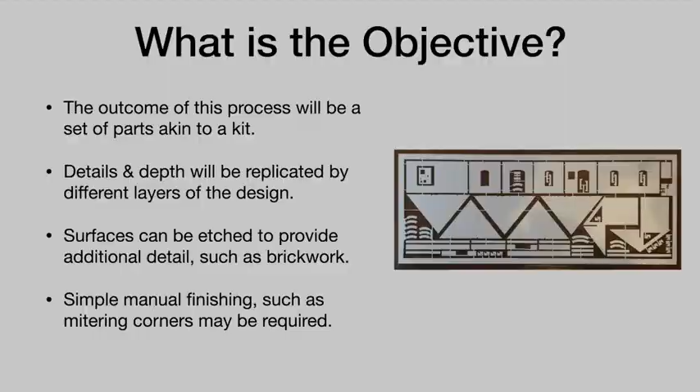A grand title for some simple information. I use TurboCAD 2D on a Mac. I export that design and use my club setup and club laser cutter to produce the final article. This process has highlighted a few compatibility issues along the way, which I will explore later.

There are many other 2D CAD products available, some of them free, but for me, usability was a key issue, and some of the cheaper alternatives are not as user-friendly, but it's a personal choice. A quick word about materials. I'll look briefly at 4 types.

I've used TroLase, the plastic card. Sometimes this is referred to as Rowmark, which is an American company and a product not normally available to the UK hobby user. A sheet of TroLase is around 1100 by 600 millimeters and costs about £30. Beware, products that are significantly cheaper and advertised as suitable for laser cutters aren't, in my experience. This may seem expensive, but with careful use of material, which I'll cover later, it can produce very cost-effective buildings.

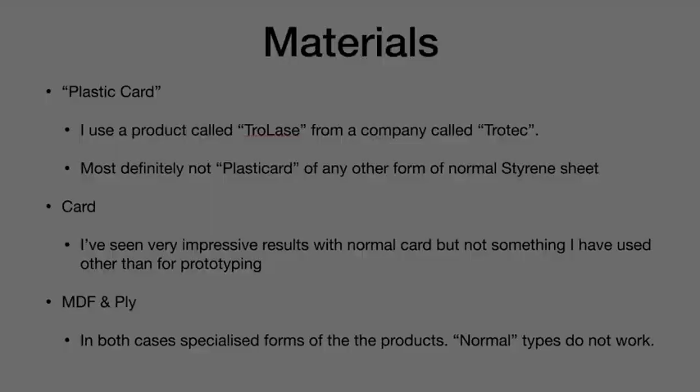My thoughts on pros and cons. Many of these are true for any building or other object made from these materials and not specifically to do with laser cutting, but just to cover those particular points. Both the plastic card and the MDF etch very well for such things as mortar courses, not something that can be done effectively with card. The slightly oily finish of TroLase requires cleaning and possibly a slight sanding to provide a better key for the paint, which is an additional job.

MDF is, in my experience, often supplied to a very nominal thickness. What is purportedly 3mm MDF, for instance, might be 3.2, 3.3 or even 3.4mm. Although that doesn't sound much, and in many cases isn't an issue, it is a major problem with any tab and slot joins or external corners. It's imperative you know how thick your final material is, certainly to the nearest 0.1mm, before you start your design.

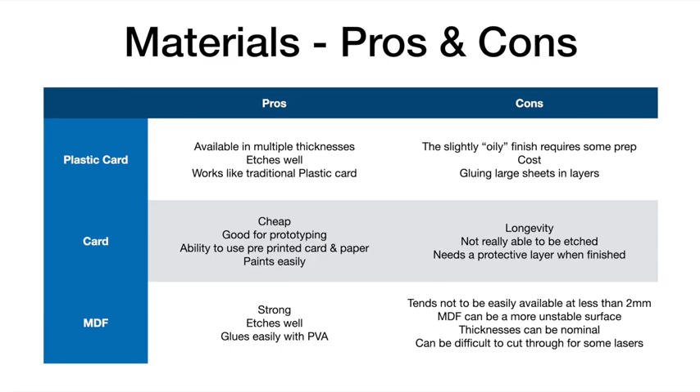Also worth noting is that MDF and ply can be difficult to cut through for cheaper hobby lasers or in greater thicknesses. I'll discuss how this can be mitigated a little later. You can also cut perspex, although I haven't done so, but again, be careful. Perspex is often cast, poured into a tray as a liquid and allowed to set. It can have a significant, in these terms, difference in thickness across a single sheet.

Now I'll look briefly at some lessons I've learnt. Obvious, I'm sure, to anyone with real CAD expertise, but as a novice, not so obvious to me at first. Rules are, of course, meant to be broken, but please consider these as suggestions that might help. All of these are fairly obvious, but nonetheless worth considering for a few moments.

It's really important to have a good understanding of what you're trying to get your object to look like before you start. If you're copying a real life item, then its size, shape, etc. will be decided for you.

But if not, I found it best to use a real building, even if I removed a few bays of windows, lost a floor, added some doors and so on. Using a real building as a basis meant that architecturally at least it looked right, and knowing what you're trying to do was a big help in the design.

Not noting the key dimensions can become incredibly frustrating and potentially disastrous. You will refer to these often. There are more than those shown here: sizes of windows, sizes of doors, and so on. It also helps if you have a good idea in your head how it will all go together, particularly regards layers and, for instance, how the corners will work. We'll look at how to help with that shortly.

Never draw the same thing twice sounds a bit odd, but all CAD programs have some kind, usually several, of replicate functions. On a large building with repetitive features, such as windows, draw it once, then use the replicate function to copy along a floor and between floors. You are much less likely to get errors.

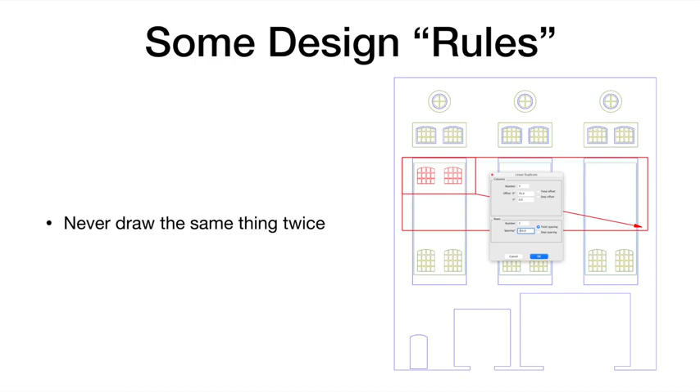Just to show a quick example. I've drawn one window and need to replicate it across all 3 bays and across 2 floors. First, I select the window and use the replicate function to create its companion in the same bay. Obviously, this is what it looks like in TurboCAD. Then I select both windows and select replicate using the major dimensions I noted earlier. And you end up with all the windows drawn.

It's quicker and, most importantly, much less likely to produce an error. You can use copy and paste, but risk putting the window in the wrong place. Even a small error will be noticeable on the final building. It is worth spending time to understand how the replicate function works in your software. This is a particularly useful lesson when drawing bricks. Drawing individual bricks will quickly become very tedious. Just one wall of the warehouse I've used to illustrate this has around 17,000 bricks.

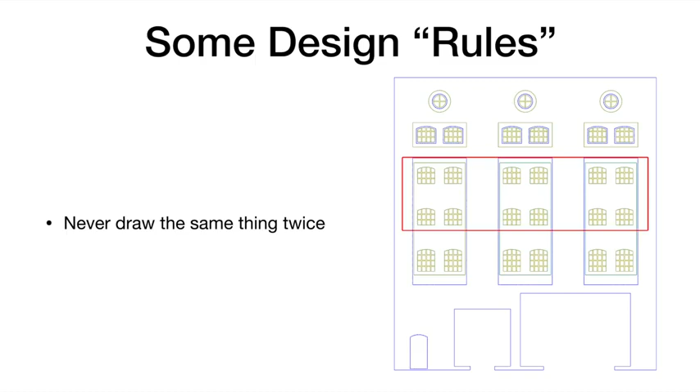When starting a new design, the first thing I do is set up the grid. 2 parts, the size and the spacing. TurboCAD draws the grid to a size you can define, even though the drawing area is much bigger. I tend to make the overall size of the grid reflect the size of the laser bed, for reasons I will explain later. The second key dimension is the grid spacing.

Typically, a brick measures 9 inches long by 4.5 inches wide by 3 inches high. In 4mm, this equates to 3mm by 1.5 by 1. Thus, for brickwork especially, I use a 0.5mm grid. That said, in a big building, this is a very fine grid and can cause problems by simply selecting the wrong grid point or the snap to grid function, which is generally a good thing, snapping to the wrong point on the grid. When drawing, say, the side of a warehouse, I would change the grid to give a wider spacing to avoid these issues, only tightening up when doing the detail.

The other thing to consider is what units you are using for the drawing. I tend to use the model size, so a 100mm long line will produce a 100mm long cut. But particularly if you are drawing a real building and using real dimensions for your source material, it might be better to apply a scale, say 1/76, so a 25-foot long line will still produce a 100mm long cut. It makes no practical difference, and it's just personal preference as to what you find the easiest.

Frankly, you can lay out the drawing in the CAD program any way you like, but I have found 2 approaches very worthwhile. The first is to lay out the object, whether it be a building or, say, a wagon or coach, as a net. Simplistically, think of a net as an unstuck cardboard box. On a box, of course, the dotted lines are creases and not cuts. Typically on a building, we might not have a base, and the top, or roof as we would normally call it, is unlikely to be a simple flat face. And so it might look something like this. In a true net, the roof parts will be at an angle, in line with the slope of the gable, but I found it easier to draw with all the objects at right angles if possible.

The second suggestion is in the use of layers. Now, layers is going to be a very confusing term. There are layers of plastic card or other material to provide the relief on your building, whether they be inset layers to provide windows and doors, or overlay layers to provide architrave, lintels and buttresses, and so on. And the CAD program you are using will have layers. These will be user definable and able to be shown in different colors and are exceedingly important in doing CAD drawings.

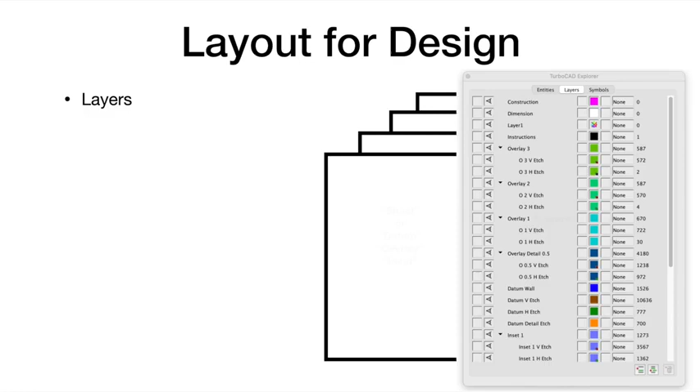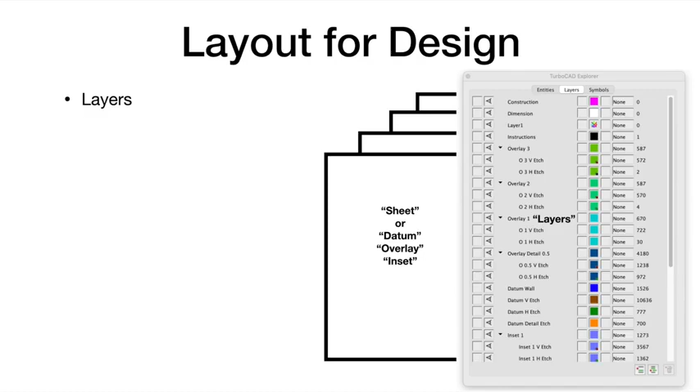Unhelpfully, it is a mixture of these last two terms that we will be looking at here. To simplify matters, I hope, I'll refer to the physical layers of plastic card as sheets. They will be datum, an overlay or an inset as appropriate. References to layers will be the layers as used by the CAD program. I will now show briefly how we go about using these layers.

The first thing to bear in mind is that there are two types of lines we will draw: cuts and etches. The names are self-explanatory, but there is a twist I will explain later. A cut is intended to separate parts, an etch is intended to provide some surface detail, the most obvious being mortar courses or gaps in planking. So each sheet of material may have, logically, at least two layers, a cut and an etch. In practice, any sheet with brickwork or similar will have two etching layers, as I will explain shortly.

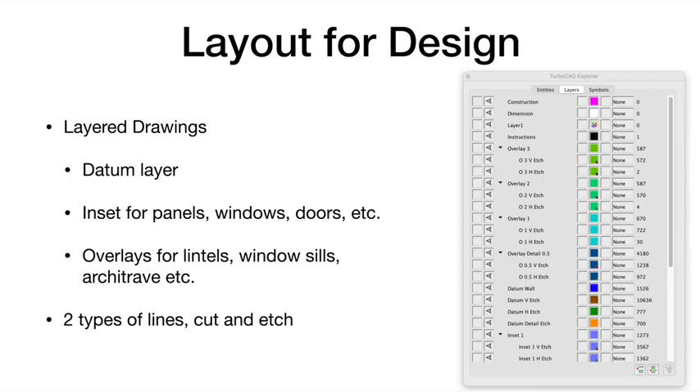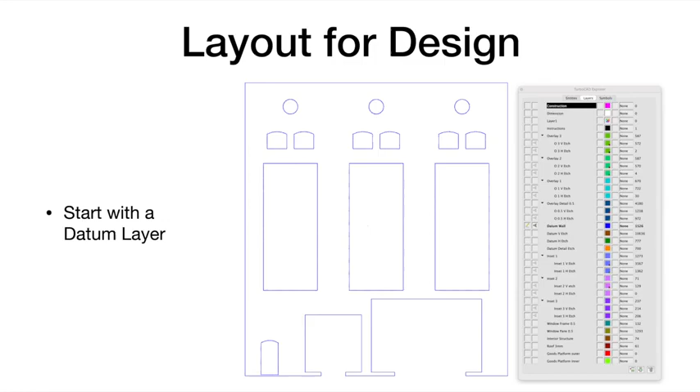Here's what a final wall might look like. We will look at how this is built up in a moment, but I just want to draw your attention to the names of the layers. TurboCAD allows the use of sublayers, which has advantages and disadvantages, so please experiment with how layers work in your software. This is the starting point, the datum layer. All measurements are taken off this layer. This is particularly important at corners, as we shall see. If some of the lines look a little fuzzy, that is the mortar course returns for the brickwork. I'll cover that later.

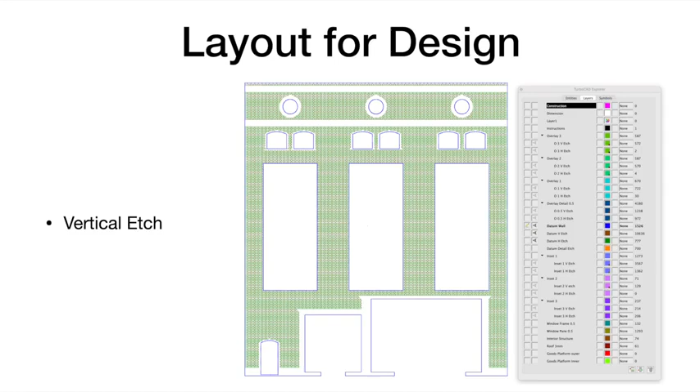Here the horizontal etch layer has been added. Although this is perhaps the next obvious step, you can see that I would have drawn an overlay layer outline at least earlier, so that I know where the mortar courses finish. Generally, draw the layer outlines, window cutouts, etc. before adding etch detail. And here the vertical etch is added. The value of having two etch layers is twofold. In the first instance, it is generally helpful to be able to switch off the horizontal layers when drawing the vertical ones. This is particularly true when trimming lines to the correct length. Secondly, it helps even out the heat of the laser, as we shall see later.

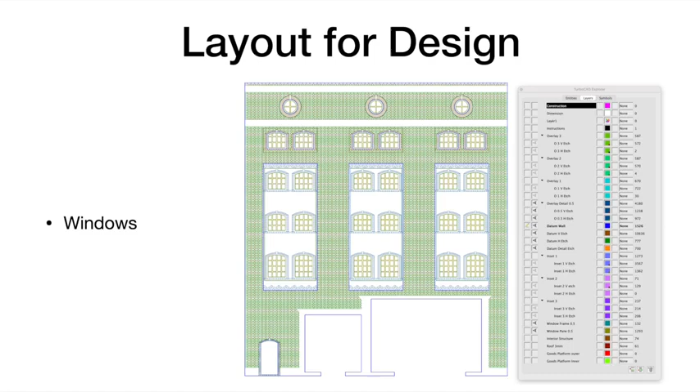Now I've added some detail with a 0.5mm overlay. This includes window surrounds and some brickwork flourishes. Next we see the window frames and window panes. There are two layers. The first one behind the brickwork will be the window frame. The second behind that carries the frame and window pane cutouts. Now I have added all the inset layers, where I have also included some doors. Adding in the overlays at the top and bottom returns us to the final drawing.

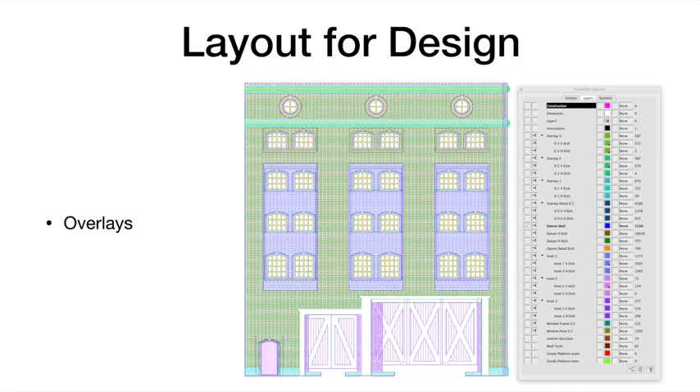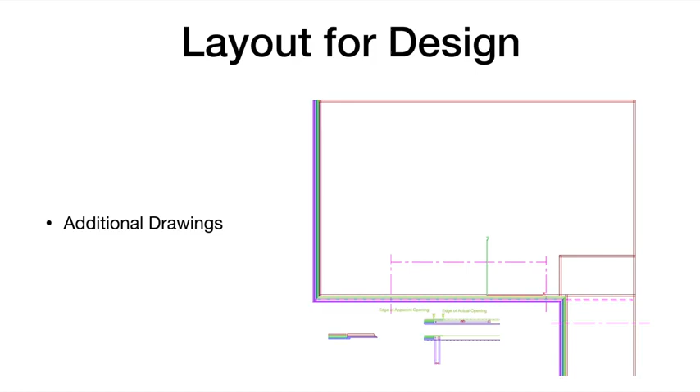One final point in drawing layers: beware of copy and paste. Certainly in TurboCAD it does not copy or paste hidden layers. The same applies if you are moving a drawing. Sometimes it's useful to have additional drawings that are not intended to be cut. These may be plans or details that don't show up well on the main drawing. In particular, understanding how the corners will join is a great benefit. Some layers can overlap, some have to be mitered. When you draw this out as full-size plans, it allows you to check the right wall lengths for the various layers.

A couple of final points on laying out your drawing. Cuts and etches have width. This will vary from laser to laser and from material to material, but it's in the order of 0.2mm. There are some areas where this is important and some where it can be ignored. And while we're on the subject, lasers do not cut parallel. This is largely because there is more heat at the top, which removes more material. For most thicknesses and materials, this can be ignored, but you should cut a test piece to check both of these factors, particularly if you are planning any tab and slot type joints.

I mentioned earlier mortar returns. These are the mortar courses that are on the inside of window and door cutouts. It is possible to replicate these to save an enormous amount of manual work if you want a realistic finish. Here, in this highly magnified view, the blue line is the edge of the brickwork. The orange, green and brown lines are etching lines to represent mortar courses. Small round circles are holes. These are 0.1mm in diameter, with the centre 0.1mm from the edge of the nominal brickwork. As the laser has a 0.2mm width centred on the blue line, it will cut away half the hole, leaving a semicircular slot on the edge of the material, acting as the mortar return.

That covers everything I plan to say on laying out the drawing to design a building or other object. In part 2, I'll go on to describe how to get your design ready for cutting and some of the practicalities of using the laser itself.